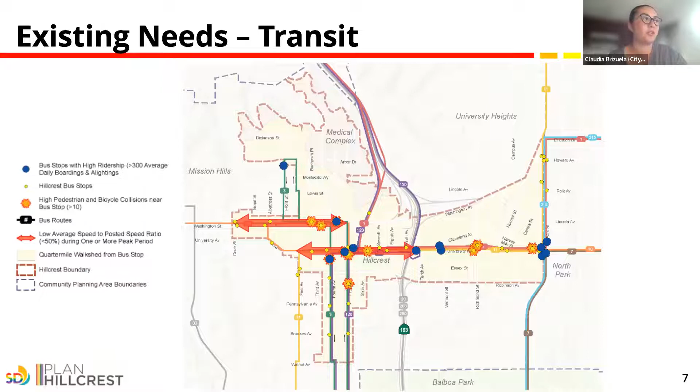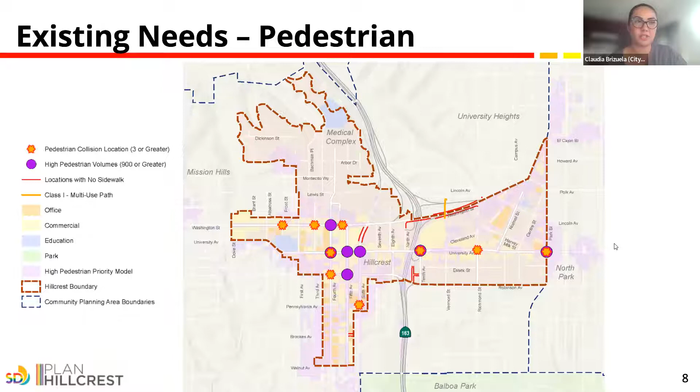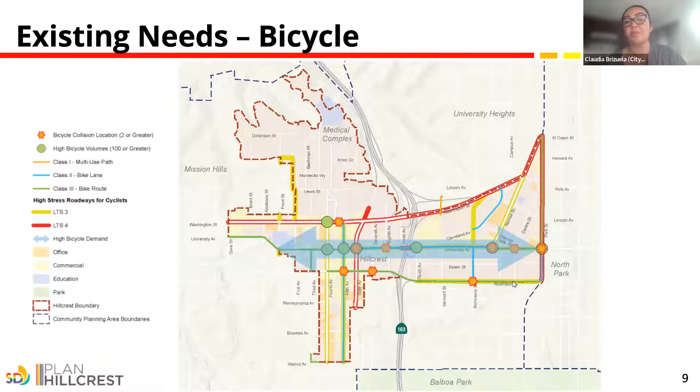So for cycling, there was higher bicycle demand and volumes observed along University Avenue, as well as on 4th and 5th Avenue. Very similar to the pedestrian needs, we observed higher cyclist-involved collisions along the same areas where we had the higher volumes of cyclists, with the exception being Robinson Avenue, this east-west roadway, which had several high collision locations, but the volume of cyclists wasn't as high as the other roadways nearby.

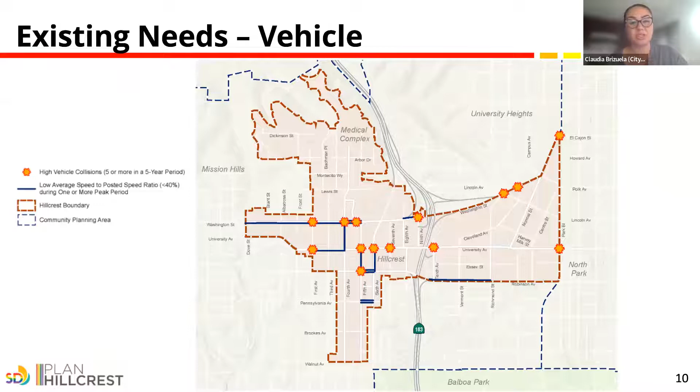Also want to touch on existing commute patterns, which help explain the demand on the transportation system. As you can see, on a daily basis there are a little more than 24,000 people commuting into Hillcrest, and a little over 3,900 people living in the community working outside. So that leaves a small percentage, 311 or 1.2% of workers in Hillcrest, who live and work in the community. This means almost 99% of people who work in Hillcrest are commuting from somewhere outside. It's important for the mobility system to have a better live-work balance and shorten those commute distances to encourage travel by other modes, so as not to overburden the transportation network during commute periods.

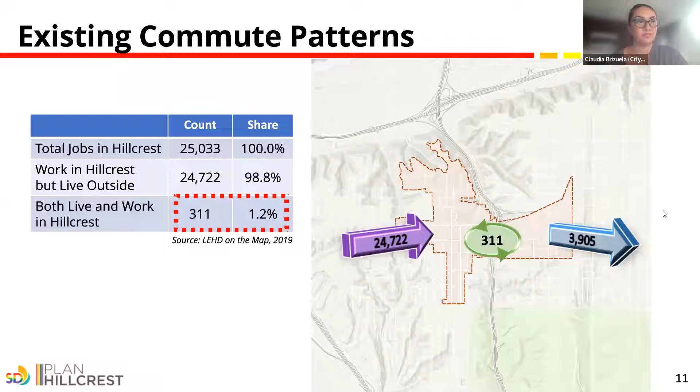We also wanted to highlight the objectives for this plan: celebrating the legacy of the LGBTQ+ community, creating public spaces, strengthening connections, supporting local businesses, and addressing housing needs. A well-designed mobility system is integrated into all of these goals.

And now I'll go ahead and let Monique go through the next group of slides to walk you through different alternatives and feasibility considerations. Well, thank you, Claudia.

Good evening, everyone. If you recall, we've shared 3 draft network options with the subcommittee last year. These options were centered around University Avenue, as treatments to this corridor will trickle down to influencing the functionality of many local streets and other thoroughfares in Hillcrest. So in the past few months, we've been reviewing and contemplating these options to identify significant flaws, in order to ensure we recommend the most appropriate networks to our community members, as well as for this focused plan amendment.

So to refresh everyone's memory, option 1 is to establish University Avenue between 4th Avenue and Park Boulevard as a transit mall with a strong focus on transit and active transportation. Under this option, vehicular travel along University Avenue at this section would be prohibited.

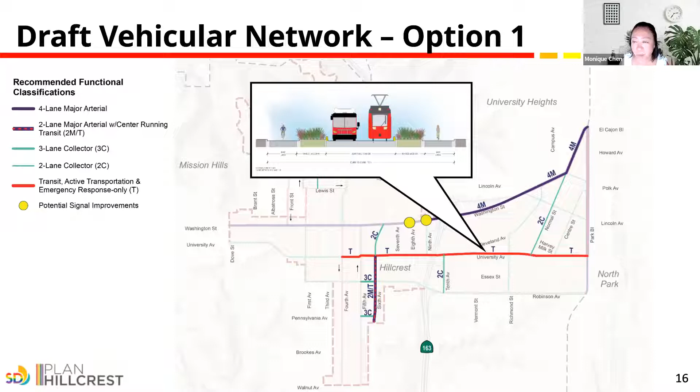Lastly, as you can see here, the red highlighted section of University Avenue will be a transit and active transportation focused corridor, where vehicular travel will be restricted. This picture reflects the potential cross-section. This proposal is unique to option number 1. Next slide, please.

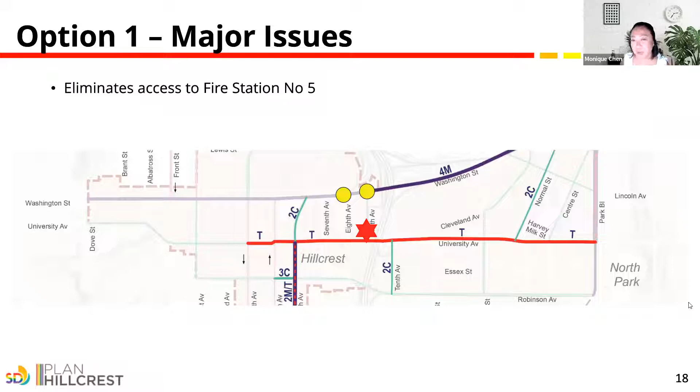Now let's talk about some of the significant issues associated with closing University Avenue to vehicular travel. First, it eliminates access to and from University for fire station number 5, located on 9th Avenue just north of University, as shown here with the red star. By closing University, it also eliminates freeway access from University Avenue at 6th Avenue.

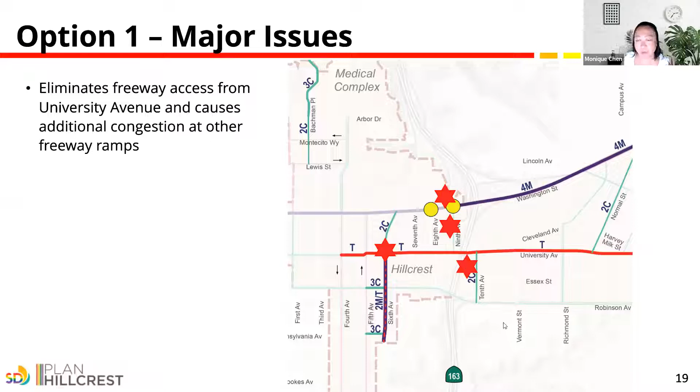This option will also likely increase traffic on other streets, including residential streets, since cars would have to detour away from University Avenue. The red stars here are just a representation of a few roads that could be receiving additional traffic.

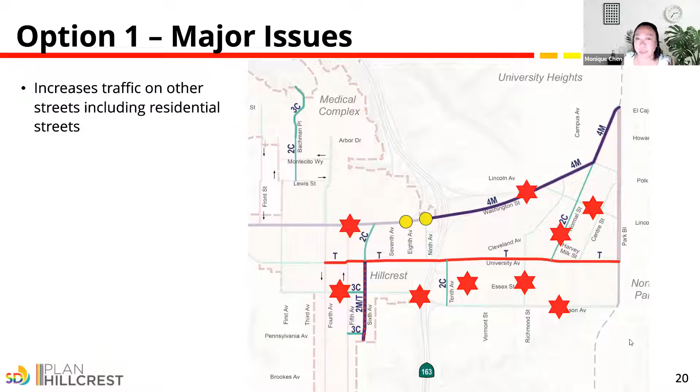Another observation we saw is that there are quite a few north-south streets along University Avenue that don't align perfectly, such as Normal Street and Herbert Street. Closing University Avenue will certainly create some difficulties for traffic to circulate and also access from one end of University to the other side at these locations.

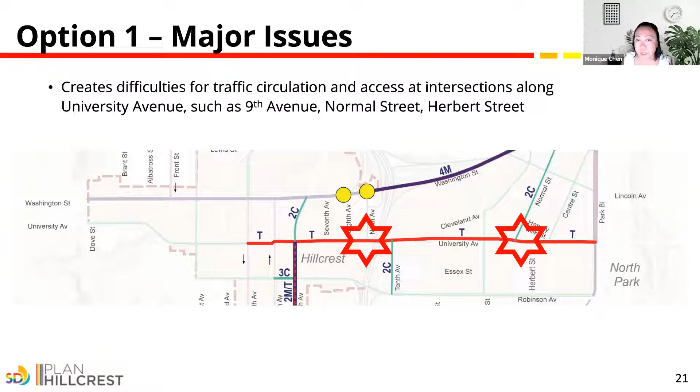The same challenge would be true for T intersections, such as the University and 9th Avenue intersection. And lastly, this option could affect business operations, as some businesses today rely on University Avenue for loading, unloading, and other delivery services.

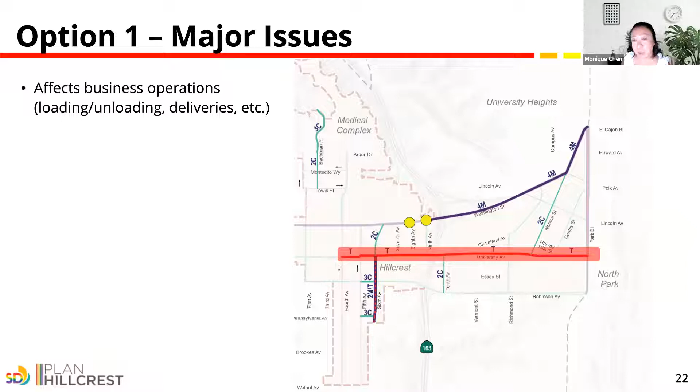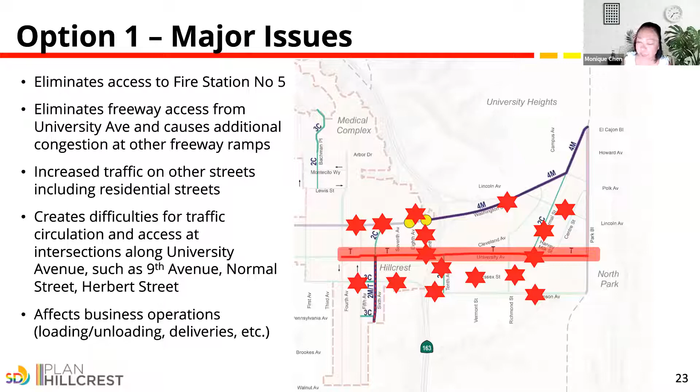Next slide. So here is an overview of a compilation of the challenges and issues we're seeing associated with option number 1. And now let's move on to option number 2.

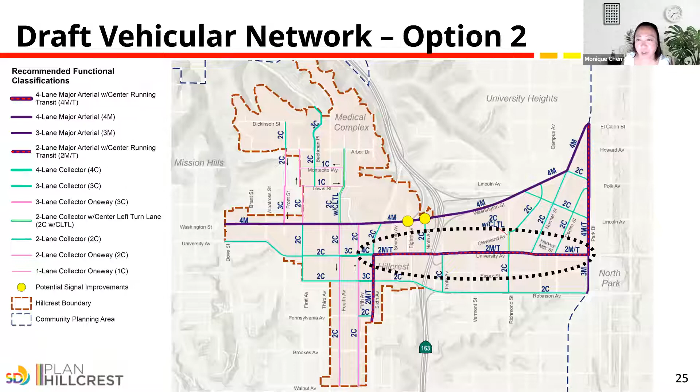Next slide, please. And here is the draft vehicular network for option 2. Next slide. One thing that I want to draw your attention to is the conversion of one vehicular travel lane each direction to transit-only lanes along University Avenue between 6th and Park. This picture here shows the potential cross-section.

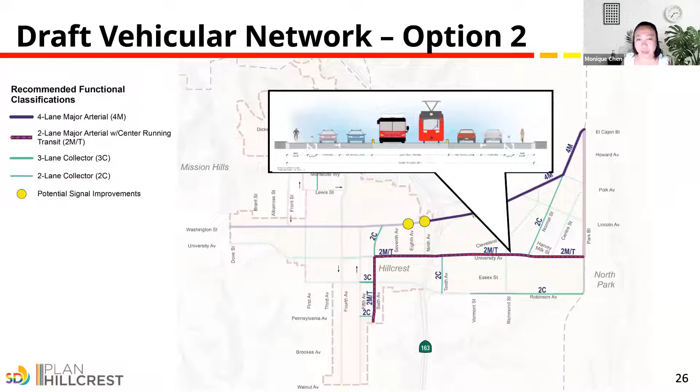As you can see, we've got cycle tracks, on-street parking, one lane of travel each direction, and transit-only lanes. Next slide. And here's the draft bicycle network for option 2. I'll point out some issues with this proposal in the next couple slides.

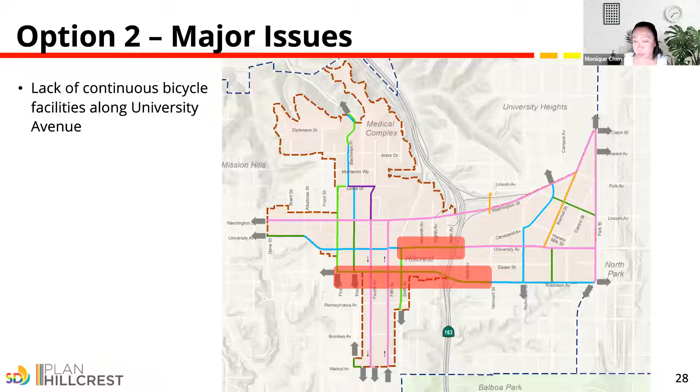Next slide. Under this option, cycle tracks are proposed along Washington Street. However, it's important to note that Washington Street today and in the future will continue to remain a high-speed, high-volume roadway, which is certainly not an ideal environment for cyclists of all ages, abilities, and experiences.

In addition, there are 3 uncontrolled freeway ramps, as you can see here with the red star, along Washington, which could cause potential safety challenges for cyclists as they have to maneuver on this high-speed, high-volume roadway across these uncontrolled locations.

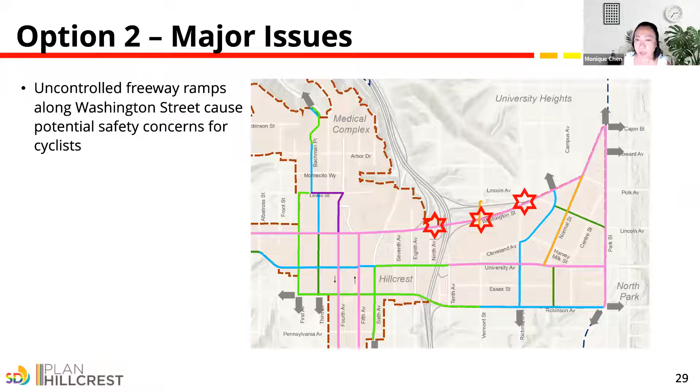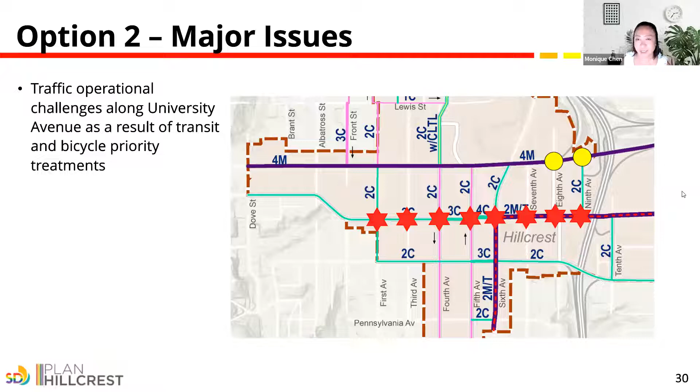To mitigate the access, circulation, safety, and operational issues identified for options 1 and 2, the team has developed and refined option 3 as the recommended option moving forward. Under this recommended option, east of 9th Avenue the proposal is the same as option 2, as mentioned earlier.

This is not a new treatment in Hillcrest. It is very similar to the one-way streets you see and functions like 4th and 5th Avenue.

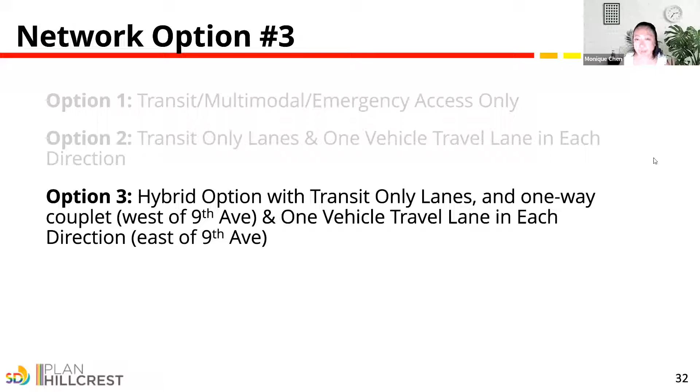I just wanted to add, you said Washington, but I know you meant Robinson. Oh, sorry, yes, University and Robinson. Good correction.

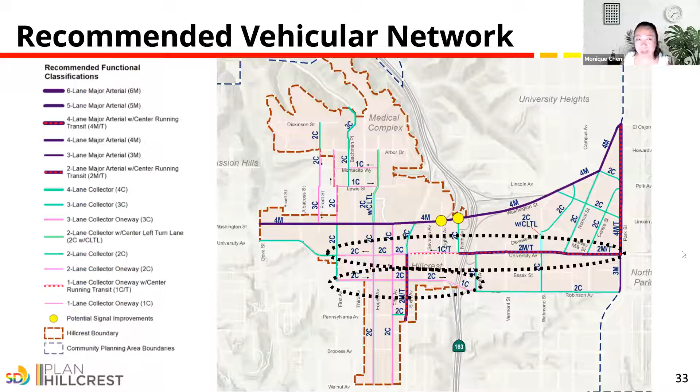Here is a look at the recommended vehicular network. As shown here, University and Robinson is a one-way couplet between 1st Avenue and 9th/10th Avenue. It stops at 9th on University, 10th on Robinson, with University being westbound and Robinson being eastbound.

Let's take a look at some representative cross sections. The bottom left shows a potential cross section for Robinson Avenue, with 2 eastbound travel lanes and a dedicated bike lane. It's also important to note there's a contraflow bike lane with a striped buffer presented going westbound.

The top left shows the cross section for University Avenue between 6th and 9th Avenue, with exclusive transit lanes, a westbound vehicular travel lane, and one-way cycle tracks. Moving east, on the top right, University Avenue has exclusive transit lanes, one travel lane in each direction, on-street parking remaining, and one-way cycle tracks.

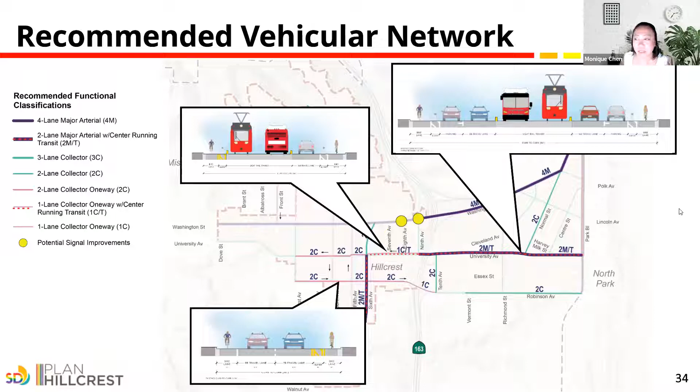Here is the recommended bicycle network. Cycle tracks are proposed on University Avenue, and Class 2 dedicated bike lanes are proposed along the entire stretch of Robinson within Hillcrest.

With that, I'll turn the presentation back to Claudia, and she will walk you through and provide some discussion on the recommended transit and pedestrian networks.

Thank you, Claudia. Just one more clarification: again, Monique, you said Washington, but it's Robinson. Darn it, thank you, darn it. It's a Class 2 facility along Robinson Avenue, and then the Class 4 along University Avenue. Thank you, I apologize. No worries.

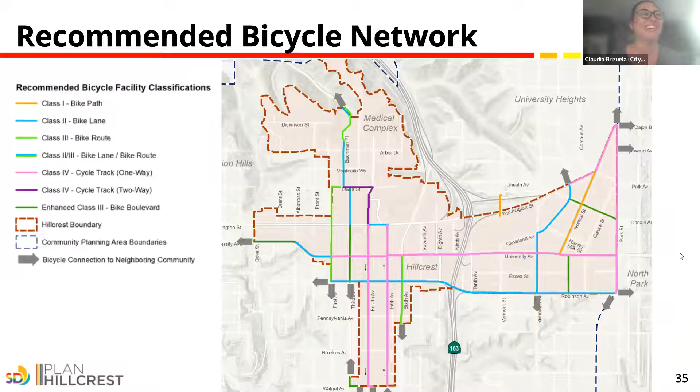What we're here to show you today is that last option, which is really what we're recommending. Monique touched on the vehicular and bike networks, and now I'll go through the recommended transit network, meant to complement those two recommended networks for the other modes, as well as the pedestrian network.

We're recommending dedicated transit lanes to accommodate existing and future transit along 6th Avenue, University Avenue, and Park Boulevard. Many of the cross sections already showed that center median area taken up by transit. That's our recommendation, to ensure there's dedicated space for transit, as well as a future streetcar that SANDAG has identified in the regional plan.

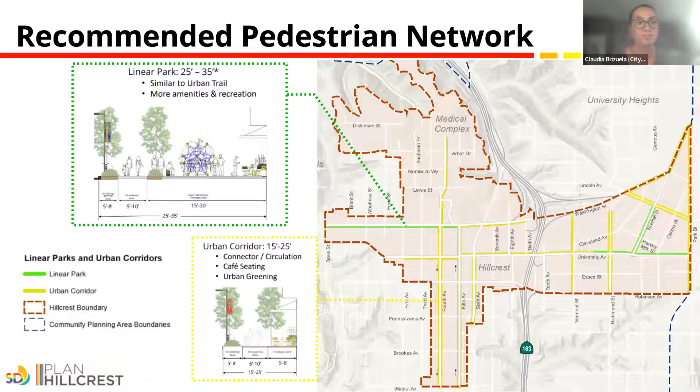So to highlight some of the advantages of our refined or recommended mobility network, we feel that the network we presented to you today provides transit priority along several community roadways, especially Washington Street and University Avenue. The one-way couplet along University and Robinson Avenue improves operations and safety, especially at intersections, and it also increases roadway capacity to better accommodate future growth.

Emergency access is very important, and our recommended network maintains access to and from Fire Station 5 so that emergency vehicles can respond to and address fires and other emergencies quickly around the community. The refined network also provides continuous bikeways on several major roadways, both east-west and north-south, to get to destinations throughout the community via bicycle, and also connecting to regional bikeways nearby. We feel that this is the best solution based on all the challenges for the different corridors.

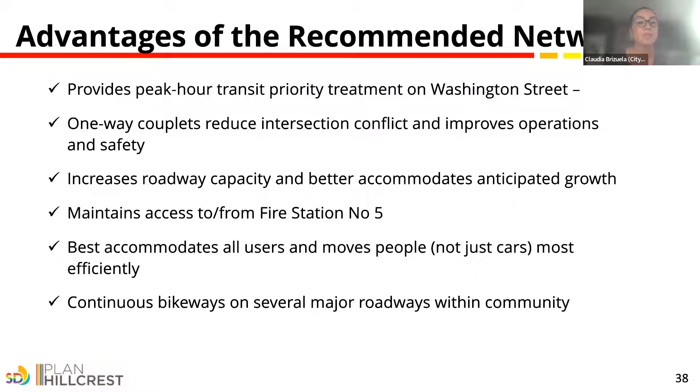This refined network also aligns with what were the preferred options in the online community engagement platform, which shows their support for this strategy in addition to our professional input. Our recommended mobility network as a whole addresses many of the comments we've received, as it improves and prioritizes bicycle and public transit, in addition to including streetscape improvements for pedestrians and preserving curb space. Some may see that as just parking, but it's so much more than parking because curb space provides space not just for parking vehicles, but for business operations like loading and unloading goods, and for outdoor dining opportunities. It provides accessibility, which is important for people getting picked up and dropped off, especially for those with disabilities that aren't able to walk as far.

I also want to mention that coordination is very important. In addition to sharing this information with you all and getting input from this group, it's also important that we coordinate with our other stakeholders like UCSD and Scripps Hospital, as well as our community parking district, Sandag, Caltrans, MTS, and other city departments. We've met with many of them to ensure these solutions will work for all of the affected parties. The decision hasn't been made, but we are making sure to coordinate with them along the process just to make sure we're not putting out solutions that won't work.

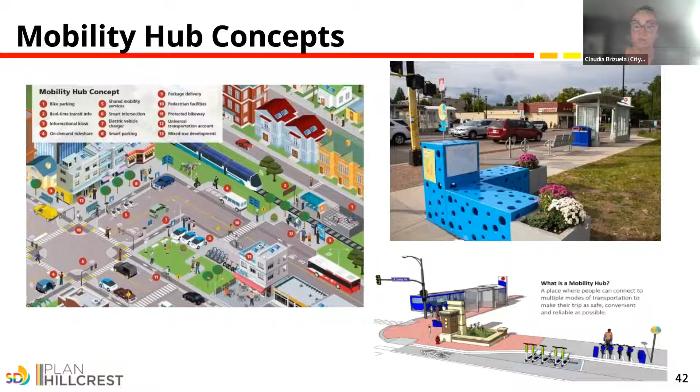A good example of something similar to the shuttles I mentioned is the Hillcrest Lunch Shuttle, and all of the recent scooter corrals that we've been strategically placing throughout the community. Those are good examples where this one location, maybe next to a bus stop, lets you get off the bus and then hop on a scooter and continue on your way to your final destination point.

One other thing I also wanted to touch on that's also not in those four network maps is parking technologies, parking management, and really that park-once concept, which is also very much in line with mobility hubs. Hillcrest itself is and will continue to be a very walkable community, so it makes it easier for people to park in one location and walk and bike to their final destination. Features like a centrally located parking area or a community circulator shuttle, like the one that currently operates during lunchtime, can help get people to their destinations without having several vehicles circling around.

And then we plan to head through the public hearing process in 2023 for amendment approval. Taking a look at the upcoming months, in July we're taking a month off from meetings. August 18th, we'll present refined land use concepts and supplemental development regulations. In September, we plan to present both mobility and land use to the broader Uptown planners. We aim to reconcile all community feedback we've received from all of the engagement efforts and present our recommended mobility network and land use concepts to Planning Commission in a workshop also in September.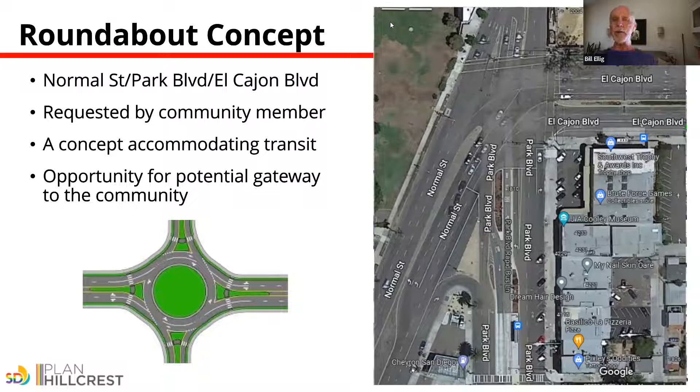So thank you. Once again, just down at the campus, one block southwest-ish, I think it's like five streets coming together. They're not perpendicular. I think there's another opportunity for reconfiguration at that intersection as well. So thank you. Great, thanks.

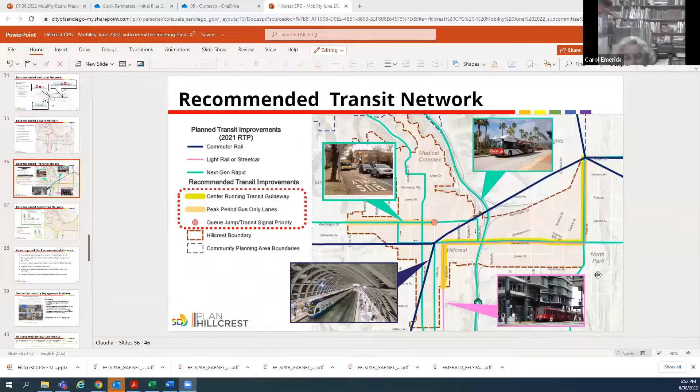Yes, thank you. First of all, I'm glad that staff made a list of the pros and cons with option one. I think option one has many drawbacks, such as blocking the fire station, blocking deliveries to merchants. And I think many of us from the start thought it was not going to be practical to close all the travel lanes on University. The city's own studies have shown that it would create big problems. The studies that were done several years ago.

I'm surprised going to the Planning Commission in September. It would obviously have to be fairly conceptual. I don't think any conclusions have been reached. So again, I'm surprised with that. I think that this group, and I'd like to ask Roy to schedule one or two meetings fairly soon for us to digest all this.

I think we have to go over some of these slides more closely, really understand the couplet and some of these other things. I'd like to understand Washington Street, that shared switchable lane for the bus, how that would work. So I do think we need time to digest it.

Then I think that the subcommittee should make some kind of recommendations to Uptown Planners and take this to Uptown Planners. I think we're getting close to the time when we need to do that. Lastly, I'm definitely anxious to see traffic studies, and I'd also like to find out when the environmental report is coming. Thank you.

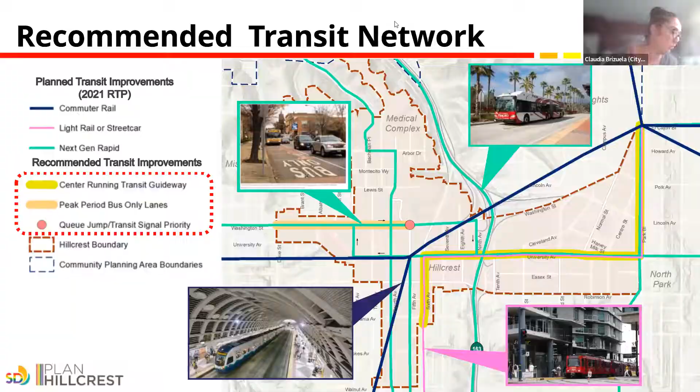So that was one question. The other question, from Tom Mullaney, was about the surprise with Planning Commission regarding the Planning Commission workshop. I wanted to let you know the Planning Commission workshop is more like an information item, similar to this, to gather feedback. They're not going to make a recommendation—it's just our way of keeping them apprised of changes made throughout the process. When we get to the hearing process, we'll go to them with an action item seeking a recommendation, but this September meeting is just for information and information gathering on our end.

Another question was about showing the bus and the trolley together—are they both using the same space, or is it one or the other? So our concepts show both because it's very much in flux. At least for the light rail, SANDAG has told us it could be a streetcar, which is rubber wheeled, or it could be light rail. They've stated it's very high level; when they get down to actually looking at implementation is where they'd determine whether it's light rail or rubber wheeled streetcar. For that reason, we thought it best to show both.

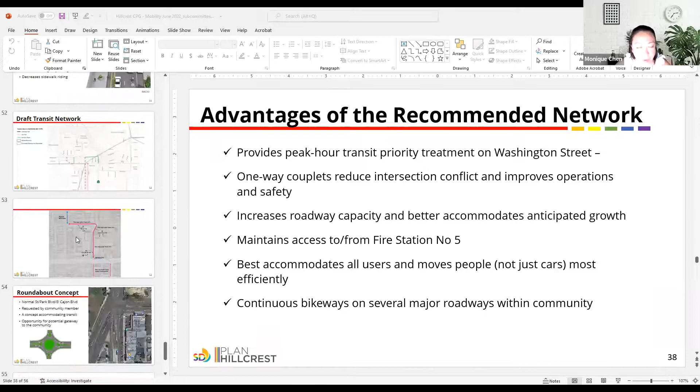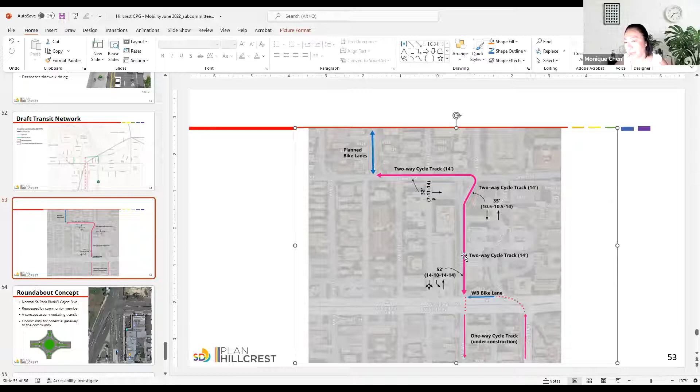One of the things I wanted to point out is that we made a modification at Lewis and 4th Avenue. Right now on the Uptown Bikeway, it comes down to 3rd Avenue and continues. But what we're proposing is to have Lewis and 4th Avenue have a 2-way cycle track on the north side and also on the east side, transitioning directly into the southbound cycle track. On the northbound side, it would come up from 5th Avenue and merge into the 4th Avenue 2-way cycle track north of Washington. This provides more protection and connectivity around a busy area with a lot of hospital and medical office traffic.

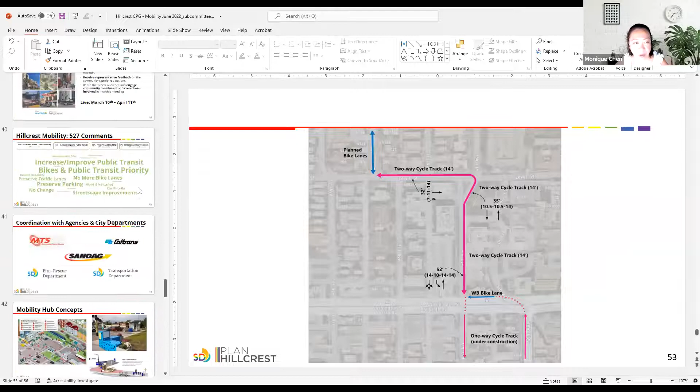One other thing I wanted to point out on that network is that I think there's a bit of an error here. On this section there were a lot of right-of-way constraints, so we are following the Uptown Bikeway. The blue you see here really should have continued down right at this curve to match the Uptown Bikeway. The green section is where I don't believe there's room to fit the class 2, and that's also downhill travel. So on the uphill we're still putting the bike lane to the extent possible, and on the downhill we're putting the class 3, consistent with the Uptown Urban Bikeway. This section provides a better connection into the existing cycle tracks. That's all I've got.

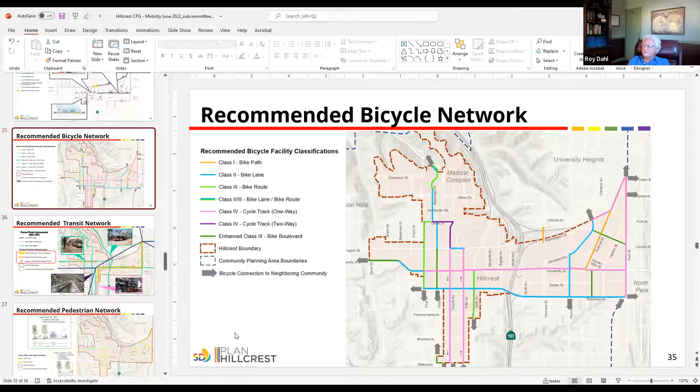Okay, thank you. All right, so let me turn to the board now and get some board comments. Who would like to go first? Matt, you're up.

Of all the comments I can make, I'll just limit it to three. First, if you take away nothing else, the city needs to recognize that it's false to claim any plan as prioritizing people over cars. It's people who are transported by cars, who drive them and use them. So the only purpose of this talking point is to intentionally sow division and score points with a certain segment, and it needs to be stopped.

The second would be: despite all the admissions and criticism of the Maptionnaire as being non-scientific and not controlled for bias or participation, and despite the understanding that its results were simply going to be considered anecdotal, we're seeing—as we had criticized and anticipated before—that instead they're being used to justify the predetermined options. This reliance on these flawed processes actually leads to a general mistrust of the entire process.